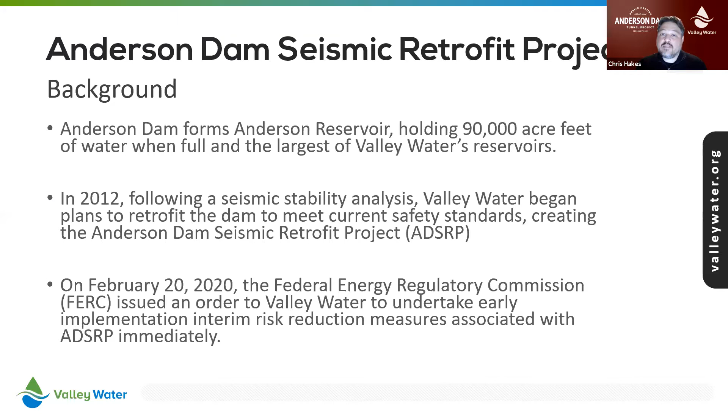They had watched Oroville have its spillway fail, and as a result, they weren't comfortable with the latent risk that was there. So on February 20th, they gave us an order, kind of changed what's happening in the project, and I'll go over that in a couple slides.

Here's our existing dam. We've got a spillway right here on our upper left, an outlet pipe that runs right under our dam. This outlet pipe's capacity is about 500 CFS, which is cubic feet per second. Compared to the 90,000 acre foot capacity of the reservoir itself, it's kind of like punching a little tiny straw into a 55-gallon garbage can. It's not a very good way to regulate the level of the reservoir.

We have our dam crest, which is just the roadway on the top of the dam, and our dam embankment, which is all the soil that you have that is holding back the water. Specifically, our work, this is Cochrane Road right here. Whoops, yeah, that's Coyote Road. This is Cochrane that turns this way. Specifically, I believe this is where you guys are currently living in the Borrello Estates. What we're looking at is some tree removal generally in this area here.

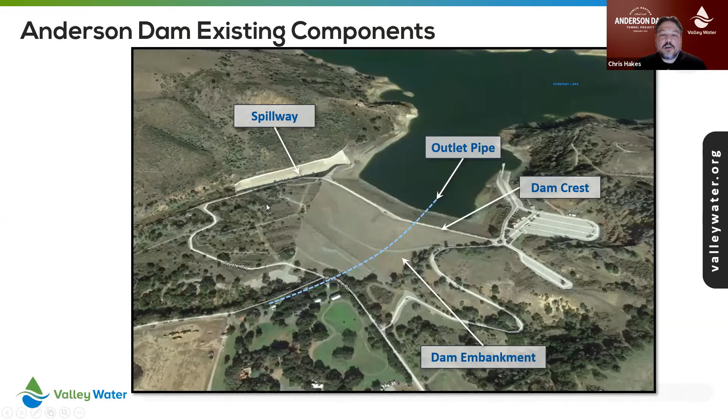I'll have another slide a little bit later on, but I just wanted to show you the aerial view before it gets into a technical plan view. Here's our current project. We are going to completely remove and replace the embankment.

That's because after some geotechnical analysis done in 2016, 2017, we determined that the original plan for the retrofit, which was just to place more material on the downstream face, was not going to work. There's actually an increased vulnerability for liquefaction in the embankment. That means during an earthquake, the soil on the dam embankment basically turns to either pudding or jello, whatever your favorite dessert might be, and has the ability to drop in the order of 20 or 30 feet.

Obviously, that reduces the height of your dam. You can have water come over the top of it. It's not ideal. So we're going to take all of that liquefiable material, replace it with suitable material, and that's going to be quite the undertaking.

We're going to completely replace our spillway. Initially, we were just going to patch it in place, patch any cracks, make sure everything was in working order. But after 2017 and what happened at Oroville, the Division of Safety of Dams for the state of California completely revised the design criteria for all spillways across the state. As a result, we're going to replace it in its entirety for this project.

We have a new low-level outlet pipe that we're installing. As you can see, it goes around the dam embankment rather than straight under. That will protect it from any movement or slumping of the dam itself. It's also much larger than the current outlet.

In the interim, we're going to create a capacity of around 2,000 CFS in conjunction with the existing outlet that will increase the discharge capability about 5 times existing. In the end result, it'll be about 12 times capacity, so very significant.

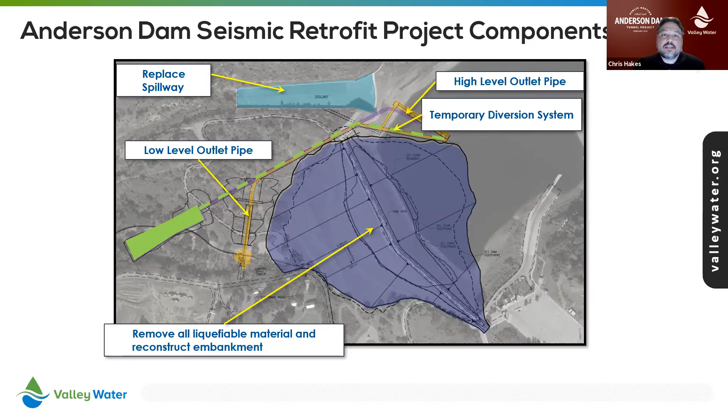So what happened on February 20th? Our restricted capacity that we have been operating under since 2009 was about 58% of the dam capacity. That equals an elevation of 592 feet. Well, when they gave us the order on February 20th, that was reduced to 35% of capacity, which is elevation 565. We were already in compliance because we were in our winter operation mode, so it was not a big deal.

We were then also to take all necessary measures to drain down to elevation 488, which is the 3% capacity. That, as Director Borrello mentioned, has been accomplished as well. We started draining October 1st, complete about mid-December. We are down at 3% right now. We're supposed to develop a plan to maintain that, which we have in place.

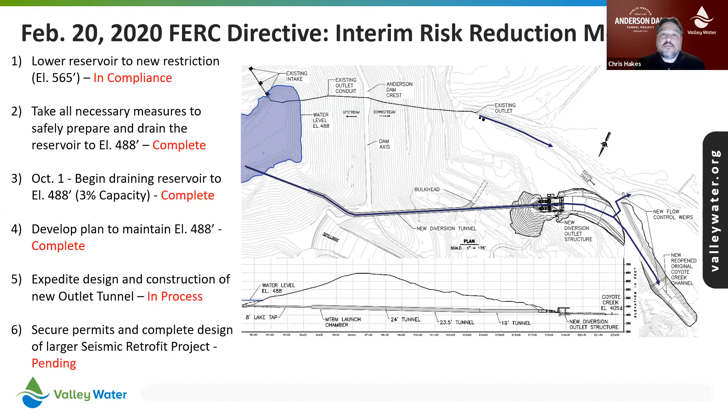And then we have to expedite the design and construction of the new outlet tunnel, which is what we'll be telling you about tonight. The last thing they said on February 20th was that we needed to make sure that the full project kept moving forward, complete our permitting and design, and ultimately go to construction. What we're doing right now helps with the interim risk, but in order to make the dam fully seismically sound, we need to complete the overall project.

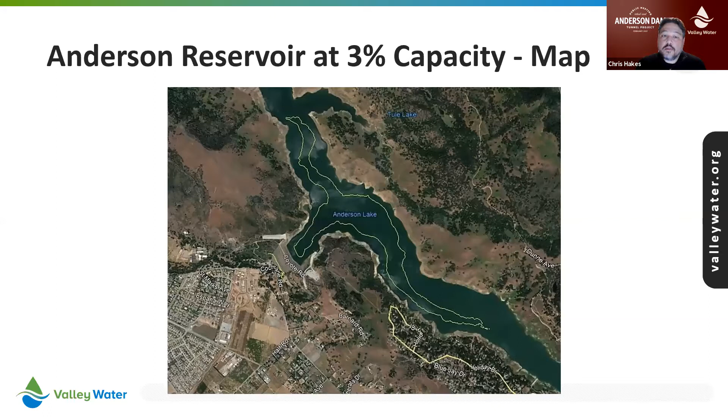So here's what you can expect to see. The little neon outline there is actually what 3% capacity means. That is still about 3,000 acre feet. Compared to the 90,000 acre feet, it's not very much, but it is as big as our Stevens Creek Reservoir. So there is still water in the reservoir at this time. It's just not a lot.

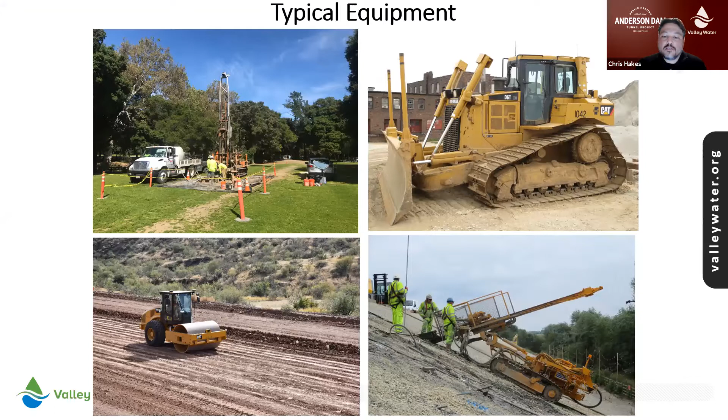If we do get a bird or sensitive species that nests in a tree, usually there's a buffer zone that's erected around it. So we can't work within a certain distance of that tree. And ultimately, we need to wait for that bird to fully complete its nesting and leave before we can do the work. As that's the case, if we have a lot of nesting birds, we have the potential to extend the construction a year or more. So we're trying to get ahead of that.

You also have some types of sensitive species which live in these tules as well. But obviously with the Anderson Reservoir down at 3%, there are some public safety hazards. It's quite muddy. As a result, we have worked with Santa Clara County Parks to close off the park. The Toyon Picnic area and Serpentine Trail is closed. Woodchoppers Flat is also closed.

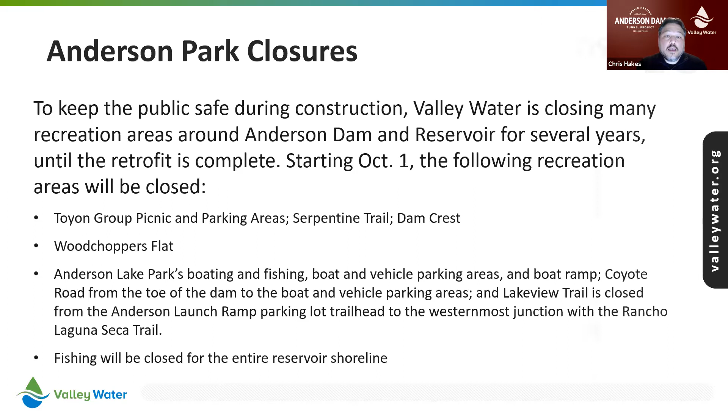The boating and fishing are out of commission for a good deal of time, probably about 10 years. We do have a map that comes up right after this, and this kind of shows you some of the impacted areas. The Rosendin area park is still open. And actually, if you go up there, you'll get a good view of the work that's going to start to commence.

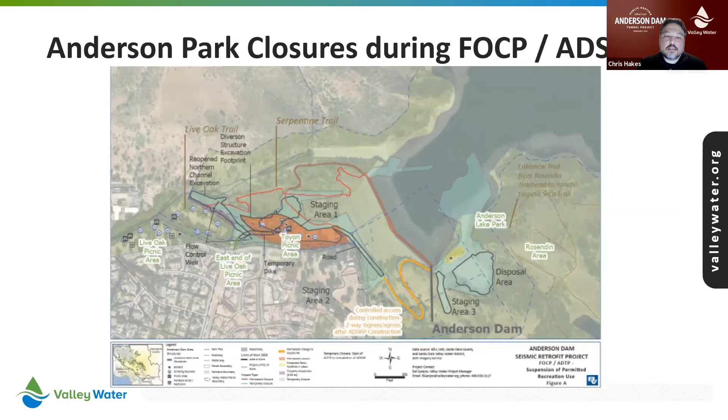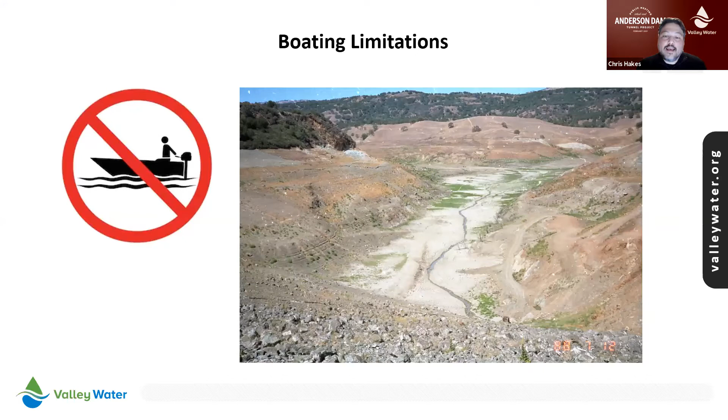Some of the potential impacts you can expect in the coming weeks, maybe as early as next Monday, February 22nd: you might see some increased flows in Coyote Creek after storm events. Because the reservoir is down to 3%, part of the way we're going to keep it down there is to keep the outlet open. So as it starts to rain and water comes in, it'll go right down into Coyote Creek.

There will also be construction equipment, so you'll hear noise, revving of engines, backup alarms, vegetation chipping and chainsaws. Work activities will be mainly Monday through Friday, occasional Saturday work, all of it in the daytime. We'll try to notify you if weekend work is occurring, but you can expect the typical construction sounds.

The thing that we're not experiencing right now, and it's not necessarily related to construction, but you may see in summer is elevated algal levels, which will cause a rotten smell, hydrogen sulfide, or rotten egg odor. That's just because as the algae blooms in that water pool, it warms up and there's less oxygen, and it gives off that rotten egg smell.

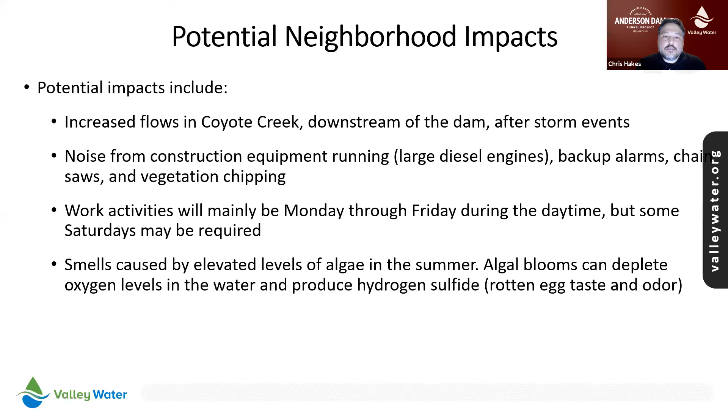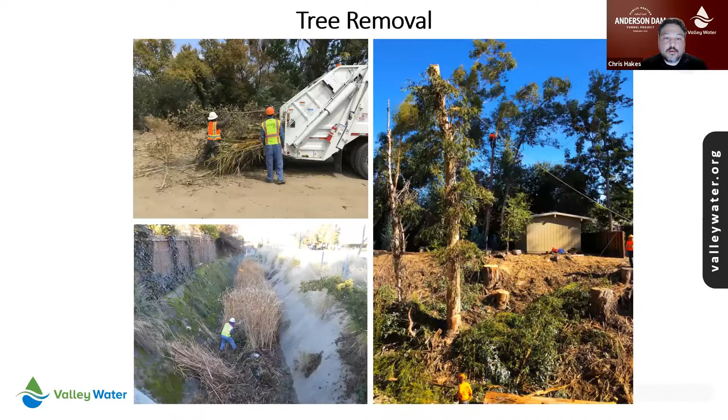Sure. And Chris, do you mind resharing the slide that shows the map of the vegetation removal in high priority areas? I think that provides a good picture that I'd like to use. All right. There we go. Yeah, that one.

And that allows us to leave the Coyote Creek that you see from your home across the street intact as it is now. So we're building this, it's kind of like a high capacity channel. And this is actually where the creek was before we built the dam. So we're using what was there before to reconstruct this alternative path for water.

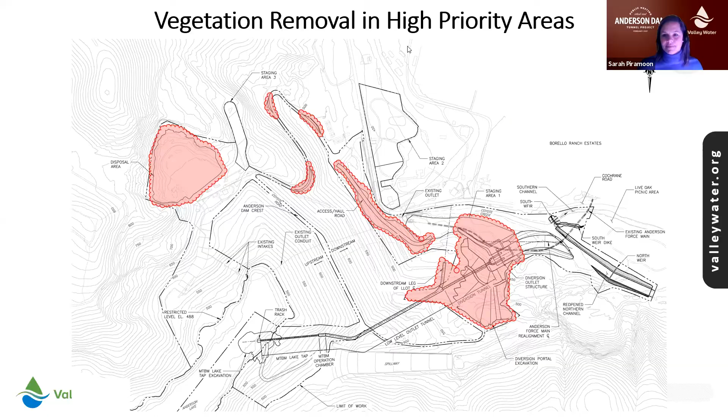Okay, go ahead and stop that screen share so I can see the questions again.

The safety standards are much more advanced than they used to be, the way things need to be constructed. Hoover Dam was built in Nevada, we're in California, our regulations are a little bit tighter. So there are different things we have to comply with. You know, frankly, I would love to build this in 5 years. I'd love to build it in 1 year. But just the logistics of what we're doing, taking down a dam while it's still in service, in place, and then constructing it basically from scratch, it's going to take a while.

Okay. Chris, just following up on that, I believe your team also did look at possibly building a dam upstream or other things like that, but there are geotechnical issues, I guess, throughout the area. And so this location, rebuilding the dam was basically the only option. Building a newer dam upstream or at a different location didn't pan out, right?

That is correct. We did look at alternate locations. Basically, the duration would have been just as long. The impacts would have been greater to the environment. So this is the best solution that we found for being able to keep this water source.